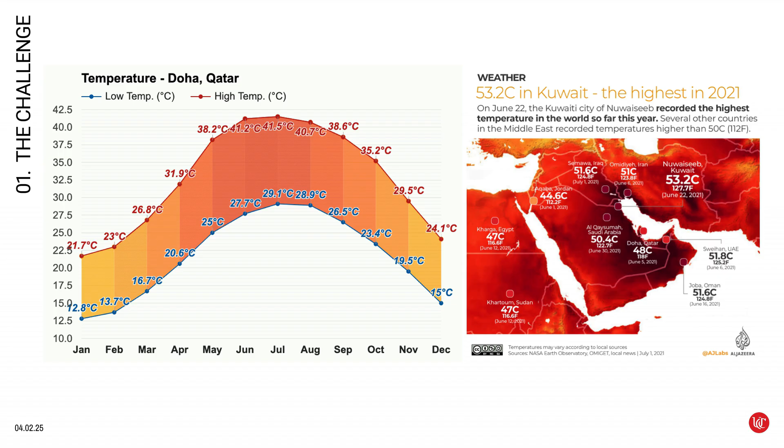As you can see from the image on the right, the region is pretty hot. But what's the overall climate like? Doha boasts a dry subtropical desert climate with very little rain, averaging just around 75 millimeters annually. Winters, however, offer a reprieve, mild and pleasant, with temperatures cozying between 13 and 18 degrees Celsius. So how do residents cope? By staying indoors during the hottest parts of the day, keeping hydrated, and counting down to those cooler winter months.

In Doha, the weather is more than just small talk. It's a daily challenge and a seasonal triumph.

Let's move on to our case studies. Lusail is the second largest city in Qatar after Doha, and the economic capital of Qatar, located on the east coast in the southern part of the municipality of Al Daayen. While Doha and Lusail boast some impressive strides in urban mobility, our journey towards a truly walkable city is just getting started. Let's navigate through the challenges and potential solutions to enhance our daily commutes.

A study in 2021 highlighted a roadblock: the heavy reliance on private vehicles. With 87.5% of people using cars for their daily routine and 93.2% relying on them for commuting, it's clear the roads are more car-filled than car-free.

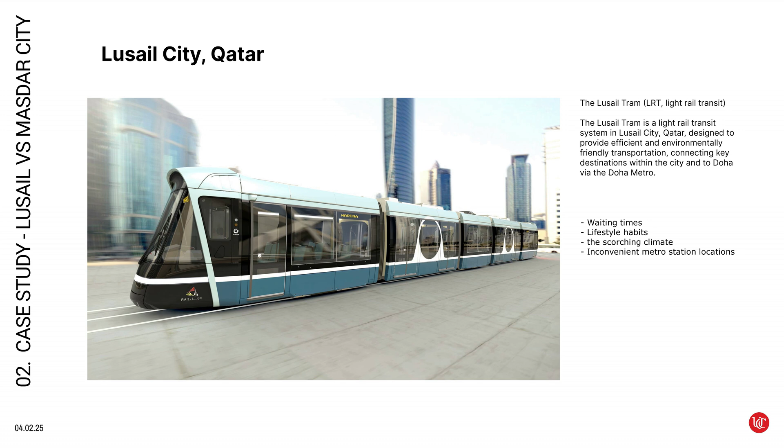So why aren't more people jumping on the public transport bandwagon? Well, 24% would consider it for the sake of the environment, but several hurdles stand in the way: waiting times, lifestyle habits, the scorching climate, and inconvenient metro station locations deter many.

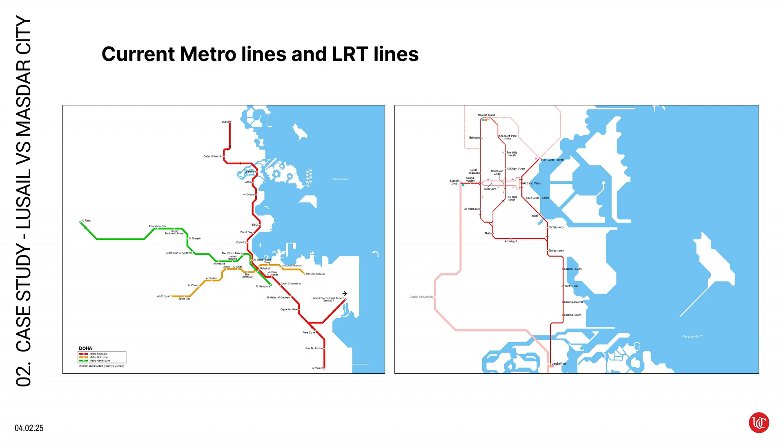The real challenge? Bridging the gap, literally. The first and last mile of our journey often lacks the necessary connectivity, making walking to and from public transportation less appealing. There may be mobility solutions such as the metro and the LRT, but they are not as popular as they can be due to the unwalkability of Doha in general.

Improving walkability isn't just about adding more sidewalks, it's about integrating mixed-use developments, ensuring safe and shaded pathways, smart mobility systems, and enhancing the overall urban experience.

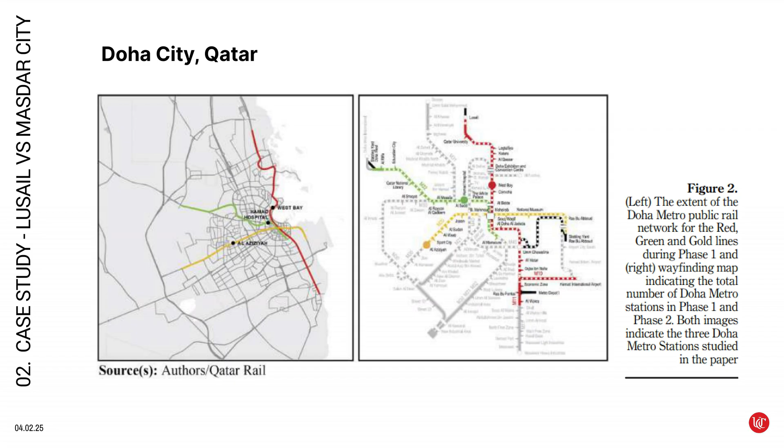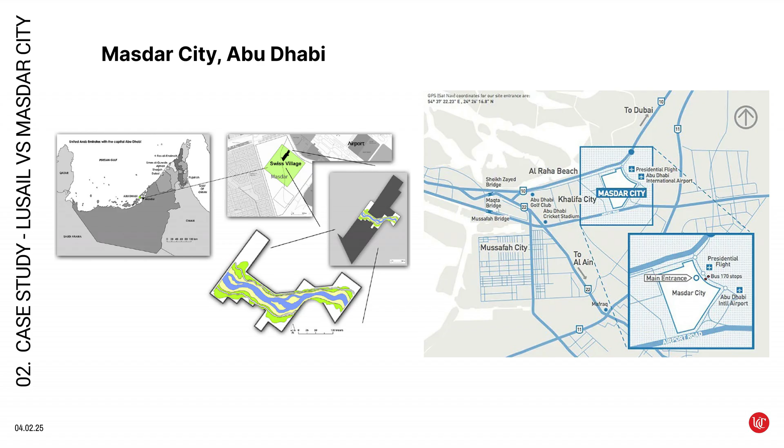That brings us neatly to Masdar City. Masdar City is an urban community in Abu Dhabi, the capital of the United Arab Emirates. Masdar City integrates cutting-edge technology and traditional architectural principles to create a low-carbon, renewable milieu that changes our conventional concepts of urban spaces. With its focus on sustainability, Masdar City is more than just an experiment. It's a real-life showcase of how cities can function more efficiently, sustainably, and harmoniously with the environment.

Let's delve deeper into what makes Masdar City a model for future cities around the globe, especially when it comes to its layout, walkability, and public transport.

Masdar City redefines urban space, starting from the ground up. The streets are narrow, shaded by architectural overhangs and lined with photovoltaic panels, not just reducing the urban heat but also powering the city sustainably.

Innovative cooling comes from wind towers that funnel breezes into public squares, while the entire city operates above an automated transportation network. The subterranean system of electric vehicles, including passenger and freight, keeps the surface pedestrian-friendly and virtually car-free.

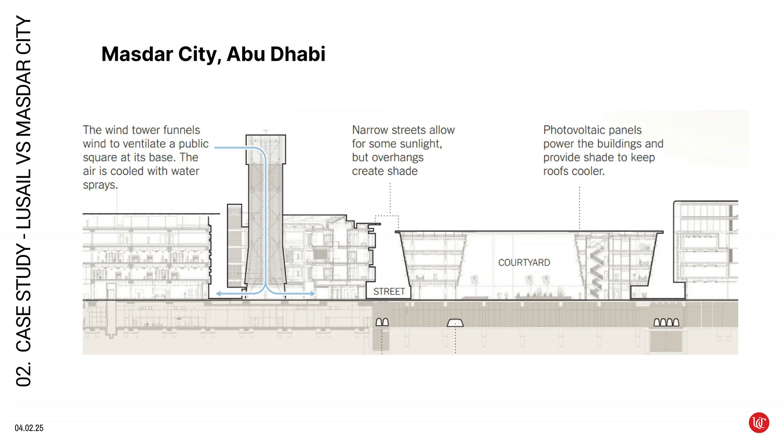Transportation is revolutionized here with the personal rapid transit and Navya autonomous shuttles. Both are electric, driverless, and designed for the crucial first and last mile, ensuring a seamless, emission-free commute.

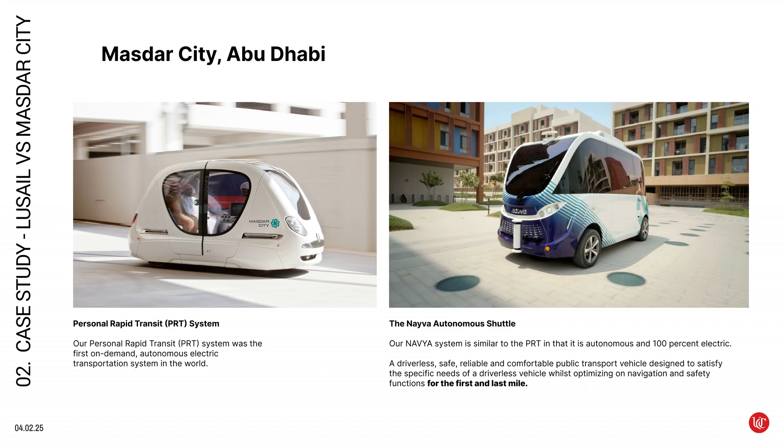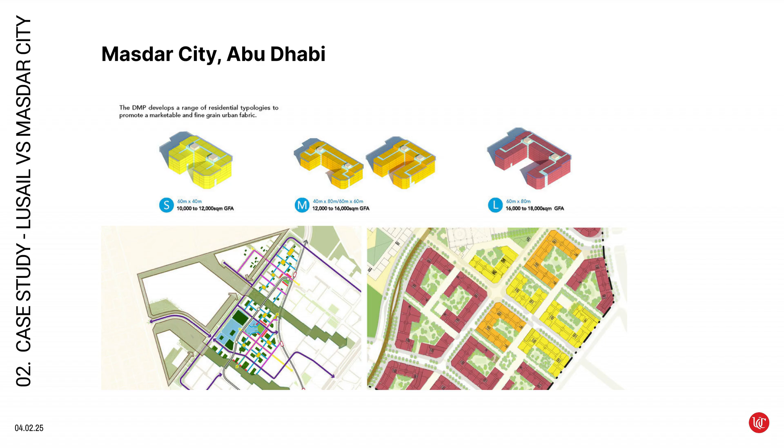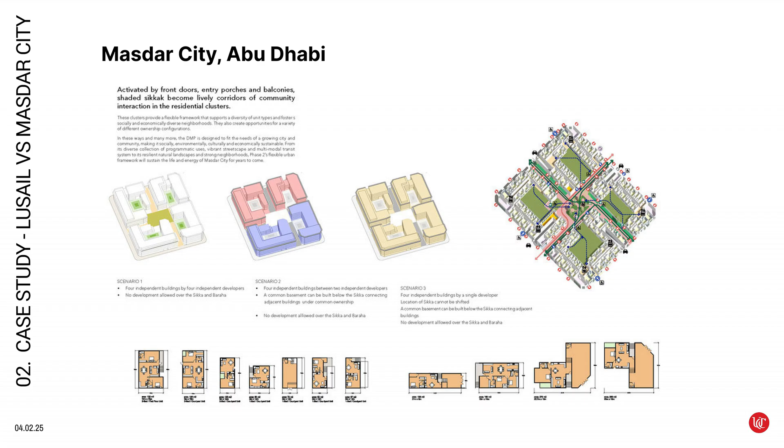Masdar's approach to urban design focuses on making pedestrian movement a joy rather than a chore. The city's layout, from its fine-grained urban fabric to shaded corridors, encourages walking, enhances social interactions, and integrates community spaces effectively. Through thoughtful integration of design and technology, Masdar City not only supports a sustainable lifestyle, but also sets a global benchmark for future urban developments.

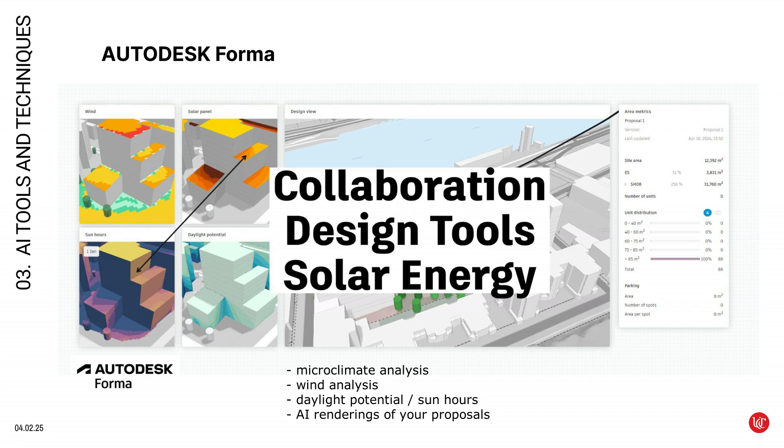For the AI tool, I will be using Autodesk Forma. The reason being, it has great tools that can do the following: microclimate analysis, wind analysis, daylight potential and sun hours, and of course, AI renderings for your proposals. It even has a compare tool which I will be using to compare the current design scheme with the design scheme I have developed that was inspired by the layout of Masdar City.

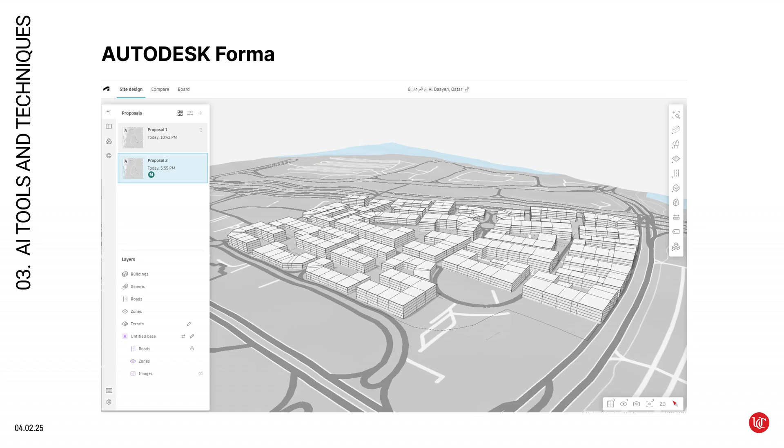I will be focusing on a small area that is only 500 meters in diameter, in Fox Hills South, Lusail. This is where I used to live. Here to the left side is the current design scheme. To the right, you can see my proposed layout. I was inspired by the Sikka scheme of Masdar City, which focuses more on pedestrians and less on cars.

I have changed the layouts of the roads. As you can see in my proposed solution, I have more car-free streets. You can also see that I've been using the Sikka layout within the superblocks, and yes, I am using superblocks to basically reduce car use within the compound.

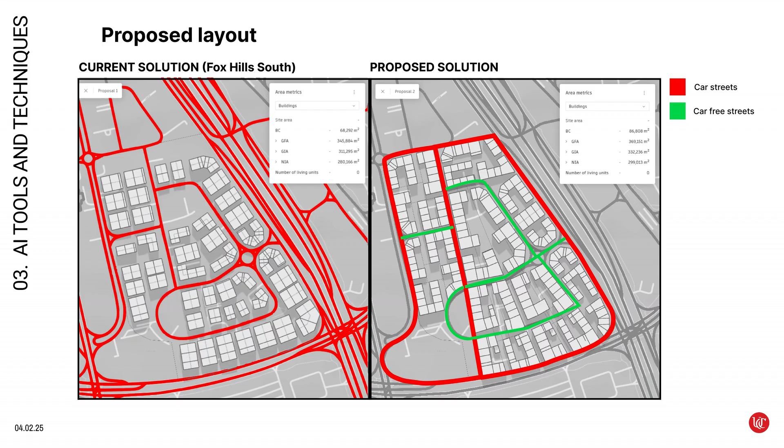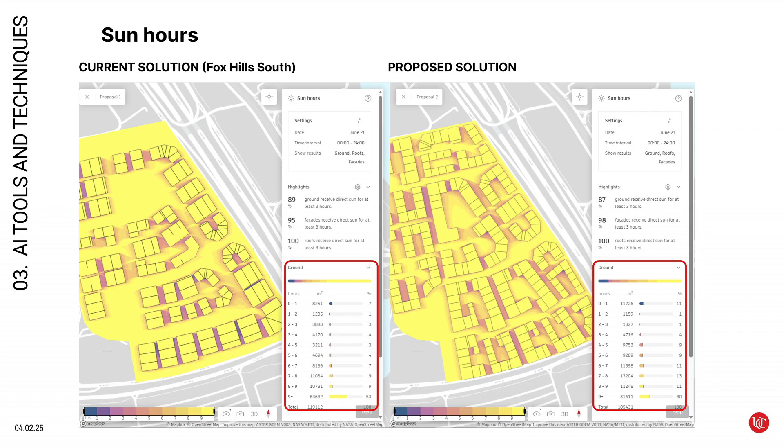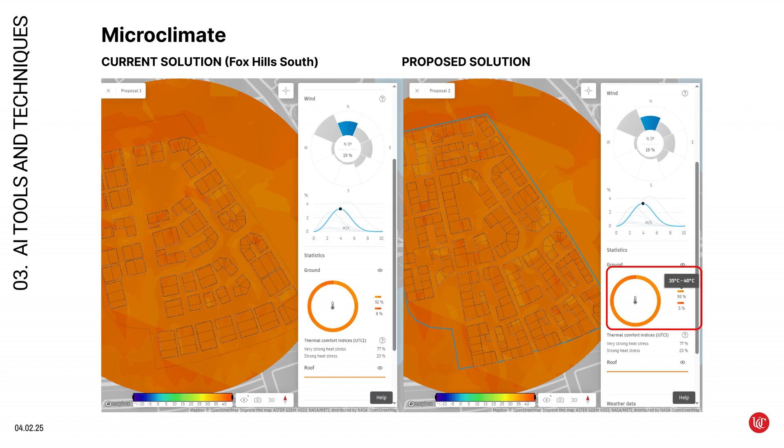We now go to the microclimate analysis. Here I have selected a 500-meter diameter circle where the analysis will take place. The analysis shown here is taken during the month of June, which is one of the hottest months in the country. When comparing the current solution to my proposed solution, temperatures that range from 35 to 40 degrees Celsius has been increased from 92% to 95%. Although this might not be a great difference, having the shaded walkways and narrow alleyways will make the walking experience much more pleasant.

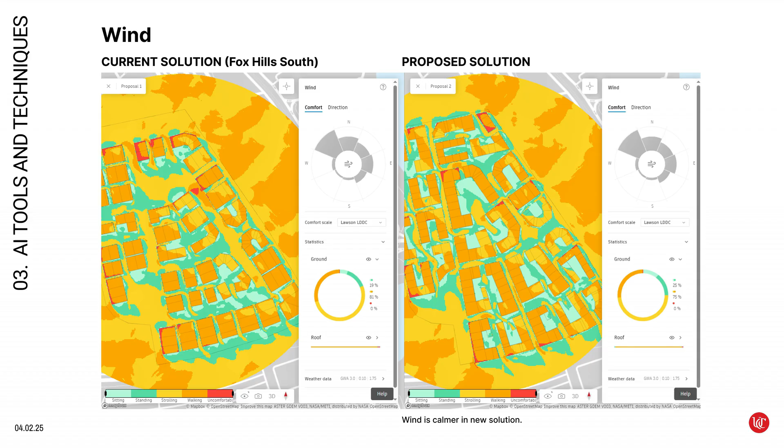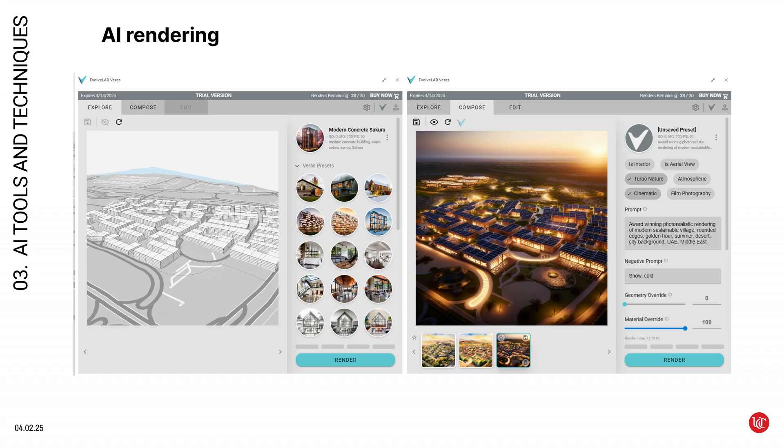And last but not least, we have the AI rendering feature of Autodesk Forma. I simply angle the camera to my desired view and open the EvolveLAB Veras extension. The prompt I used was: award-winning photorealistic rendering of modern sustainable village, rounded edges, golden hour, summer, desert, city background, UAE, Middle East. And here is the final render.

Upon seeing this, I already have a lot of ideas on how I can improve the design, and it is a great tool to quickly see your design proposal in context.

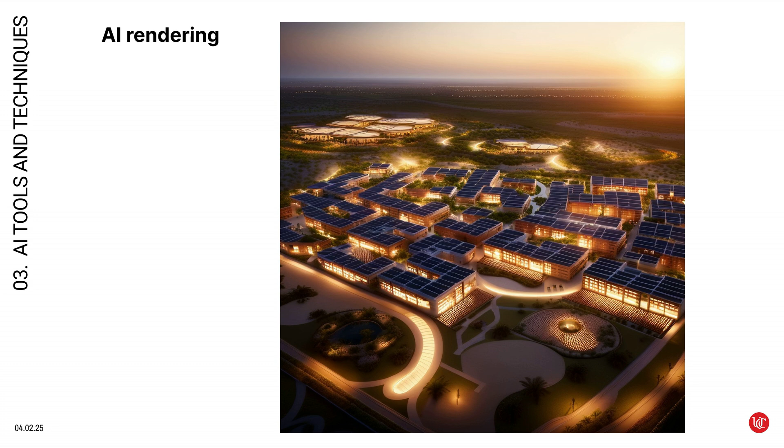And that brings us to the end of our exploration today. There's so much more that can be explored, from the vertical layers that stack up to form a truly three-dimensional urban experience, to the intricate mobility systems that keep the city buzzing and vibrant. Given more time, I'd love to dive deeper into these aspects, examining how they interplay to create a seamless and sustainable urban tapestry. And with that, thank you for joining me on this fascinating journey into the future of urban living. Until next time, keep envisioning the possibilities.